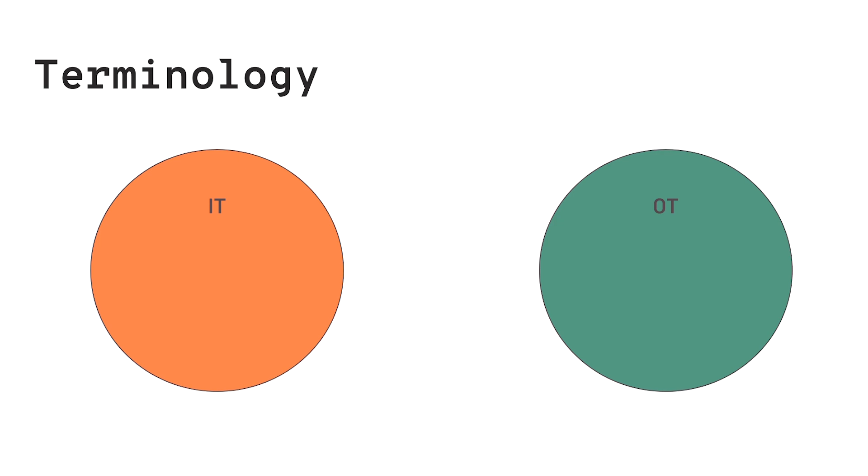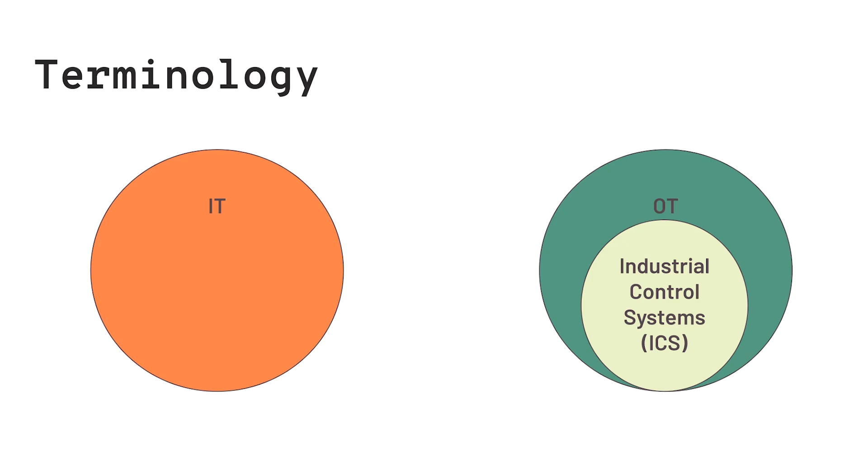And we already saw before IT and OT, the differences, information technology, operational technology. We can think of ICS as a subset of OT, even though the terms may be used interchangeably in the literature. ICS is more of a subset of OT, with ICS mostly focusing on the system side, while OT is everything besides the systems as well, which, for example, will include the human factor. Social engineering, anything that has to do with the human operators, that's part of operational technology.

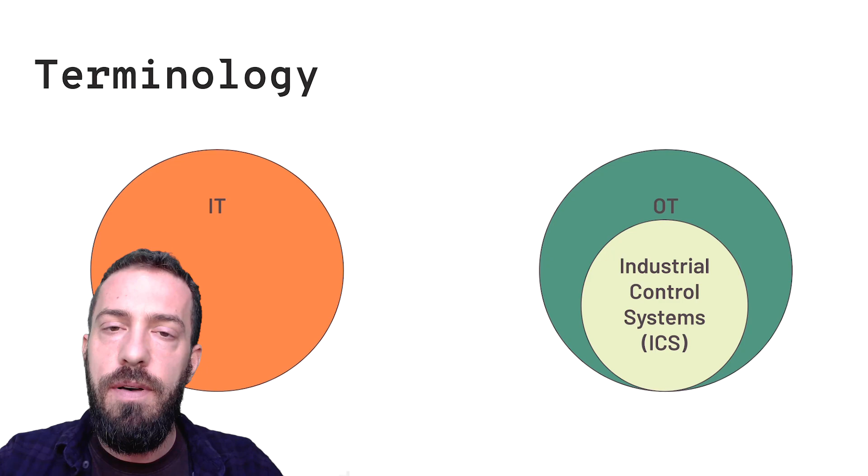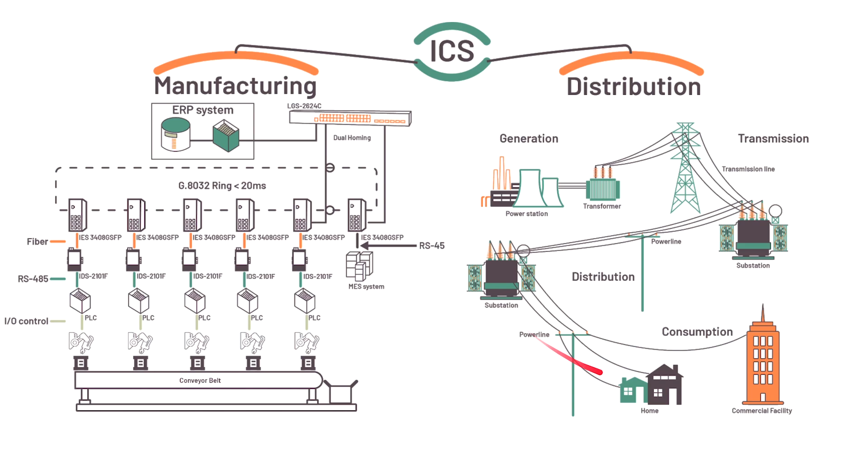So in this case, these are very far away from each other, many miles away. You have over 100 miles of cables to substations, and then to an actual city. And it's important to understand the distinction, because for the different ICSs, manufacturing or distribution, we have to think about security differently. When something is geographically confined, we're not really worried, for example, about the remote communications.

But in the case of distribution, the substation can be far away, can be unmanned, so there's no one there to check whether someone is physically entering and trying to cause some kind of an attack to the system. And these also imply more remote capabilities, so you want to access them remotely. There's no sense of an air gap when we talk about distribution ICS. Here we can think of an air gap because we have a building that could be locked with access cards. There the individual buildings may be locked, but there's open air communication, so the substations can communicate to the control center and send information back.

So an attacker can interfere with a communication. If it's radio frequency communication, maybe they can jam it, right? So the way we think about security here, we can think maybe integrity attacks on the communication, that it's not the same here, right? Someone probably needs to physically enter in order to cause some kind of a disruption. Of course, I don't imply, and it's never been implied, that this is more insecure, right? It's all about doing a good job in securing.

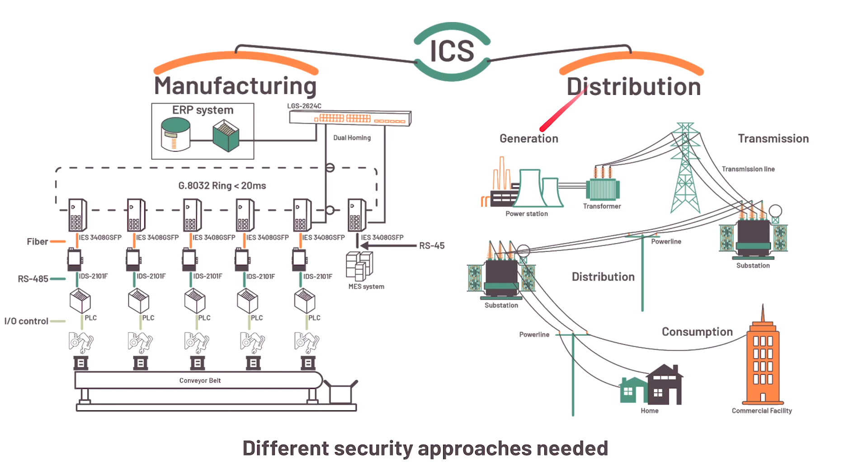between the two. And here we may have the illusion of the air gap, and someone might think, okay, that's a locked factory, so I don't need to worry about security. And at the end, the manufacturing asset could be more insecure because of all the myths we discussed before. So to conclude, ICS can be broadly seen as manufacturing, geographically confined, and distribution, geographically dispersed assets. And we need to approach security differently for the two types.

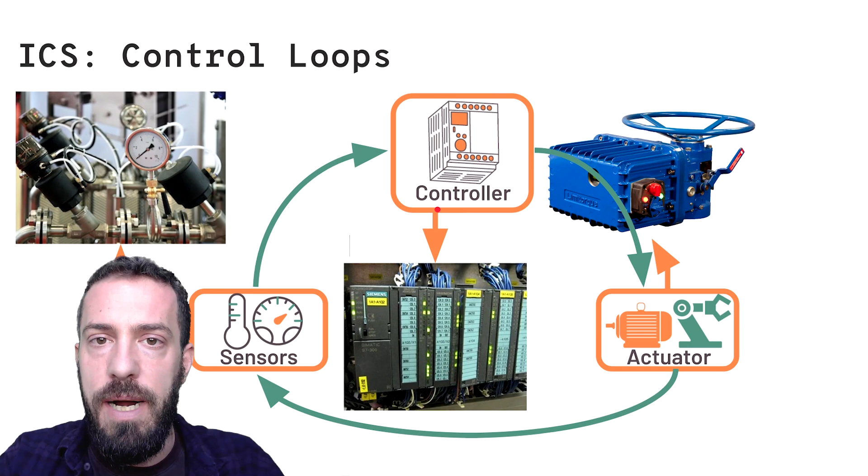Another term that we'll use a lot in this course is the term control loop. The loop refers to something that loops over and over, and control here refers to the control of some part of a process. So this control loop starts with sensing, right? You have some kind of physical phenomenon, you're measuring it, and based on this measurement, a controller receives it as an input and will calculate something in order to produce some output. And this output is given to an actuator that will control something like a valve, for example.

And the control of the actuator is causing the measured variable to also change, to change actually the values. So in case we're measuring water flow, for example, the sensor senses the flow rate of the water, and the controller needs to stabilize that, right? It needs some constant flow, so it asks the actuator to open the valve or close it accordingly to some extent. And once the valve is adjusted, the flow rate changes and is sensed as a different value, and there could be some fluctuation that we're trying to stabilize.

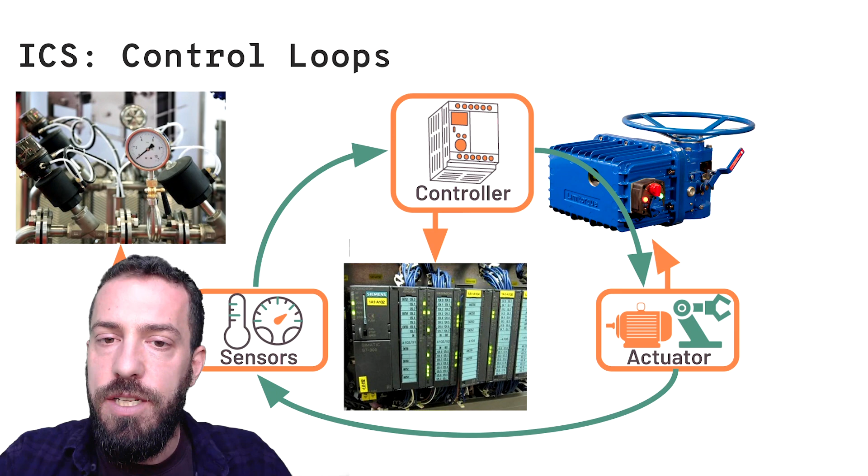So you can think of a pipe where you're measuring the rate at some point, and at some other point there's a valve that you can turn in order to reduce or increase the flow of water. And you may want to keep it steady, or you may want to fluctuate it according to what's actually happening in your control process. So again, that's a loop, because you take the input, you control, you actuate by moving the valve, causing a different flow. Changing the valve changes the rate. The controller reads another input and produces another output for the actuator, and so on. So this is the loop: sensing, control, actuation.

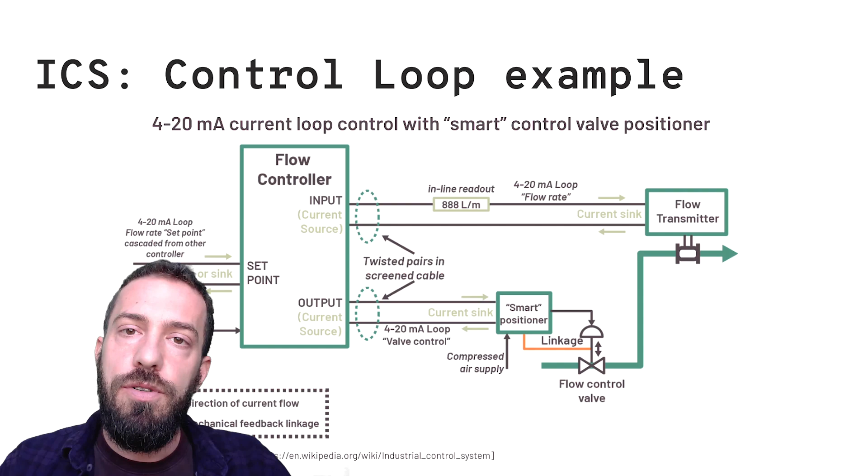So the control loop is the main component of an ICS architecture, right? The control loop is what we saw now: sensor, controller, actuator. But there are more things in a typical ICS architecture. And one of them is the process itself, right? Because besides your effects on the process, what the controller decides and accordingly actuates, the process itself may have disturbances, right? Depending on what the process is, you have also external factors affecting it, and then you have to take appropriate action in order to make sure that your process is steady.

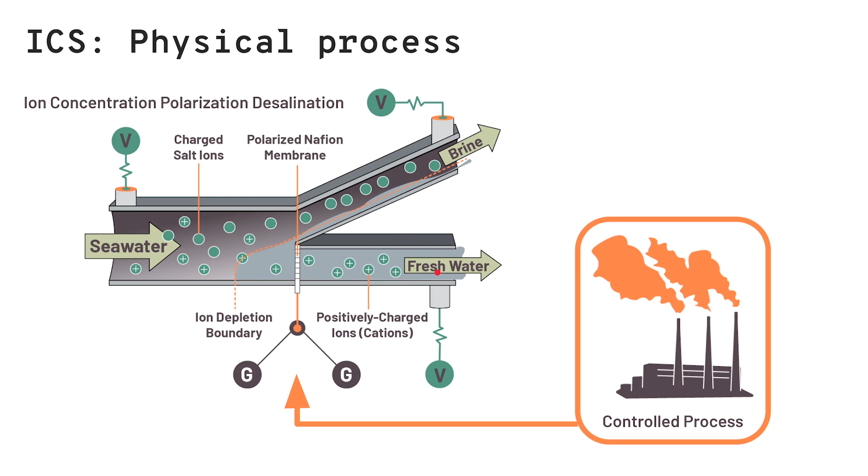This is a continuous process. Seawater keeps flowing in, and fresh water keeps coming out, and the byproducts, brine, also keep coming out. There are different ways you can actually remove salt from water. This one is membrane-based, and specifically it's called ion concentration polarization desalination. In this process, you bring current to the water flow, and this current is charging the salt ions, allowing the membrane to separate them from fresh water. So with this process, you can separate the salt from the water and have the separation that you're targeting.

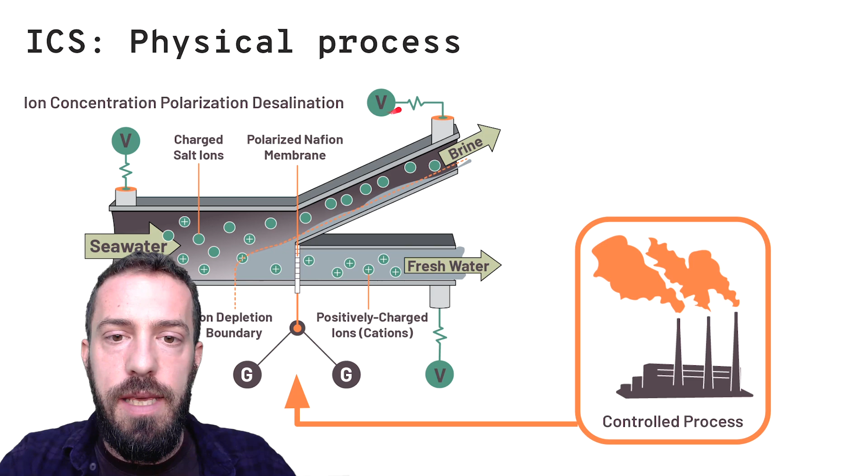In this example of a control process, there are disturbances, right? So the seawater, you don't know its exact salinity. It might fluctuate throughout the operation of the plant. So you have to be adjusting the voltages dynamically, see how the separation works, and then see if you have the proper flow of water and brine coming out as expected. So by sensing the separation rate on the membrane, you can adjust the actuation of the system accordingly. So that's an example of the control process, right? Sensor, control, and actuation.

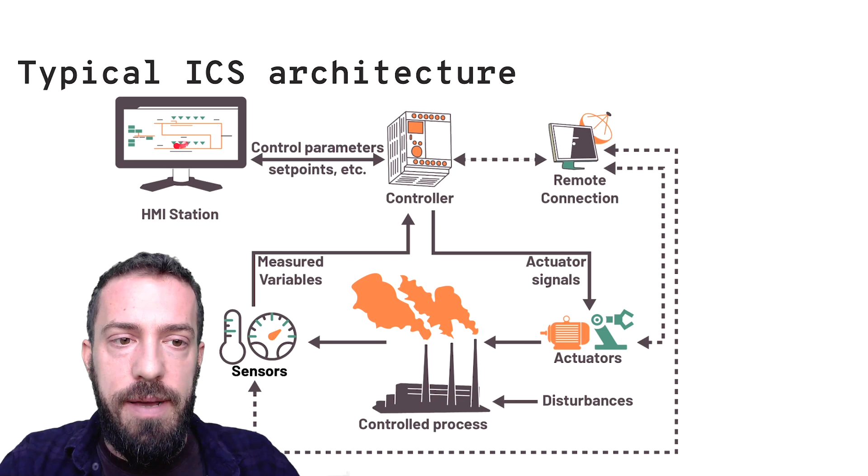Another very important component of the ICS architecture is the HMI, right? The HMI stands for human-machine interface, and it's the way an engineer can get some visibility to the process in a usable form. You cannot just observe equipment, right? You have to have some form of a graphical interface that allows you both quick access and quick understanding of what is happening in the process.

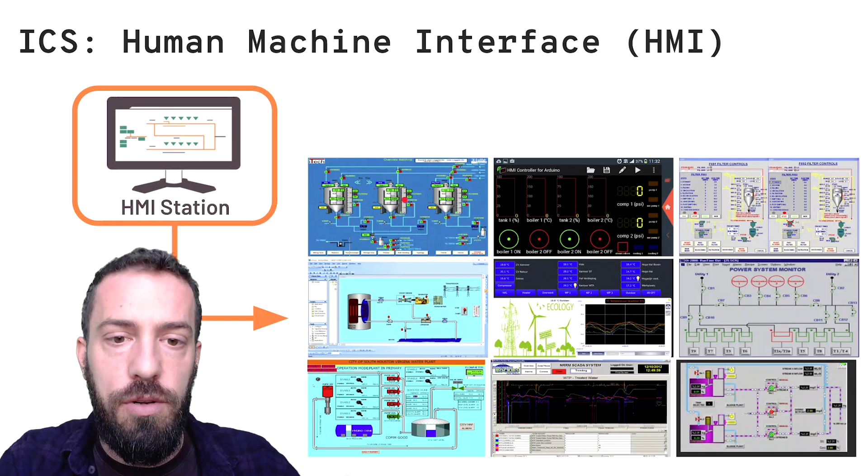In this slide, we have various examples of HMIs from different industries, from the power grid to water plants or to simpler boiler control. And this HMI, as an example here, gives visibility to the engineer to see what is happening in the process, but also gives some very simple control if you want to turn something off, like the pumps here, which are closed, which are running, you want to enable a few things and see what's happening in the process. So you have full visibility, both for monitoring what is happening in the process and for controlling it to some extent.

HMIs are very critical parts of industrial control systems, especially for cybersecurity, because they are the interface to the control system. And the HMI would typically run on a regular computer, right? You have your regular Windows machine having this interface that the engineer can use to control the process. So if that runs on a Windows machine, you can imagine that regular Windows malware can arrive to that machine, and then if it's an OT malware, can find the corresponding process, hijack it, and then use it to send commands to the control system.

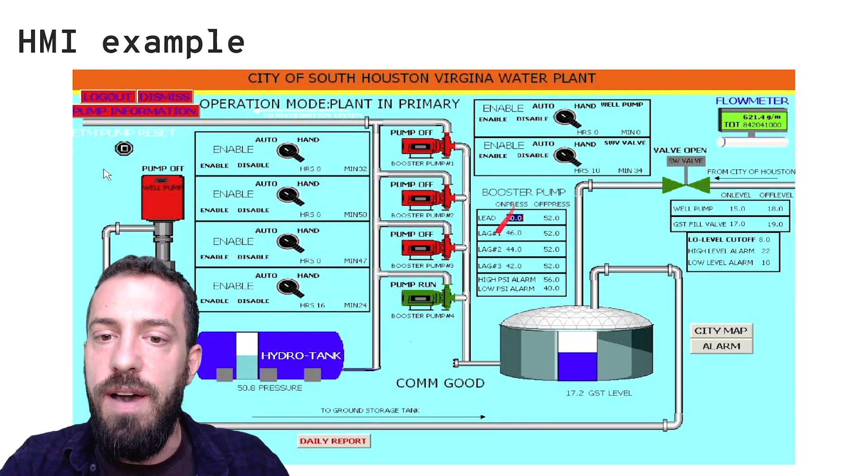And that's exactly what Stuxnet did. It went to a Windows machine that had an HMI interface and a connection to the PLC, and used that connection in order to both hijack the PLC to do something else and to fool the operators into seeing the wrong values coming in to the HMI. So they wouldn't understand that the centrifuges were not spinning properly.